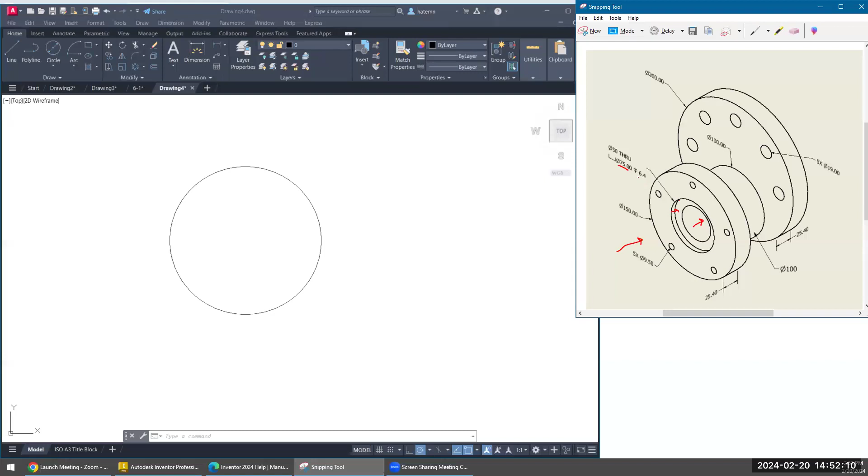And then our second circle here has a diameter of 50, and then you'll see a diameter of 75. What that means is the inside circle or hole goes all the way through our object, and it's a diameter of 50. Our outside object is a diameter of 75, and it only goes down a depth of 6.4. So we don't have to worry about our depth yet, but we do have to worry about both our sizes.

So we'll go ahead and grab our circle, put our 75, and then also grab our circle and put in our 50. And these go all the way through our object. We'll also see that on the back side, we have a diameter of 100. So let's go ahead and put that in.

So as not to get too many circles on here, because then we also have this circle here, which is offset. You could also stop here and finish this part, but I'm going to go ahead and continue, and you'll see how it's drawn as we go.

Now, one of the things I'm going to tell you that might be a little bit easier is, since we know this 100 we just created is going to be a hidden line, because if you look at it from the front, you're not going to be able to see it. So it may be a good idea to go ahead and make that a hidden line.

If you don't have your layers created, all you have to do is go to your layer properties, and we'll go ahead and create a hidden line, and we'll just add the items as we need them. And I'm actually going to make this orange. And then don't forget, you have to change your line type. So we're going to go to load, go down here to our hidden, and make sure we select hidden, otherwise continuous is going to stay.

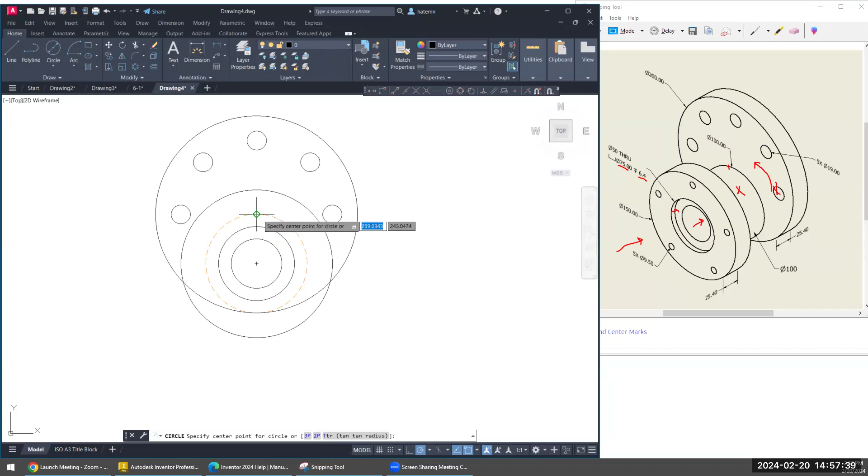And it looks to me like in the textbook, again, I don't have it on my drawing here, it's aligned on a 125 diameter circle, so 62.5. So we'll do our snap from. And 62.5 is just half of 125. Put our at symbol. We're not going left or right. We're actually going straight up. So we'll put our 0, comma, 62.5. And there's the center of our circle.

And we can go ahead and put the size, and in this case, it looks like it's 9.5. We'll do our array, select our circle, hit enter, select our center location, and you'll see 6 is the default, but we're going to change that to 5, and then select close. So that's everything that we would need at this point.

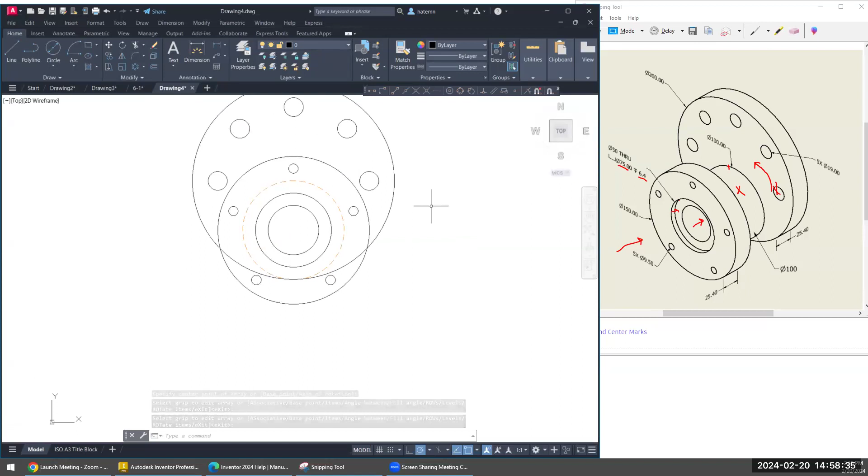Now, one thing you will notice is we have some things, for example, this circle here, we do see this outer arc, but the arc in here, we actually don't see. So we're going to have to trim that component off. Let's get rid of that. But we have to still show it. So you can do this in one of 2 ways.

You could create an arc using endpoint and center, or sometimes I find it just quicker to just create a new circle that's a hidden line, and then go ahead and trim the excess. There we go. So there's that hidden line coming through, and there's my circles here, circles meaning holes. We're not going to worry about our dimensions or anything like this.

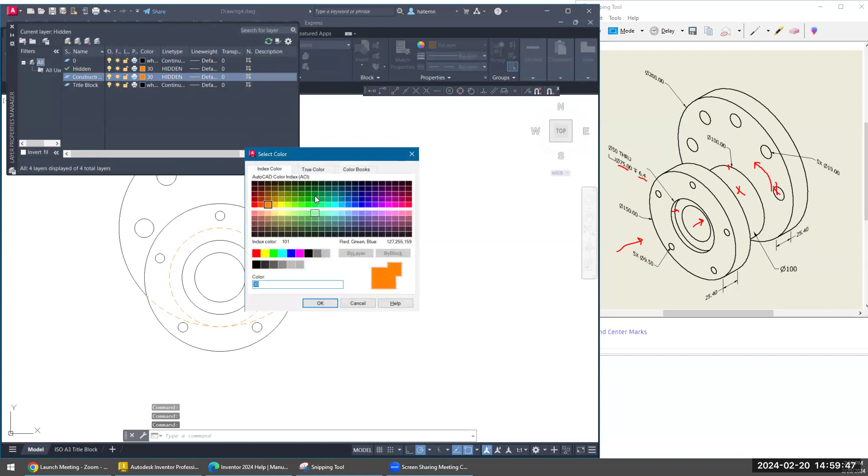So if we were going to create a side view of this to show additional information, because we don't know widths of any of these, I'm going to create a construction line. I'm going to make it solid. Oops, let's put our gray color in there and then make it solid. You get that object line. And again, I don't particularly like using construction lines. I just use individual lines, but you could do whichever is best.

Whoops, let's change it to our construction line. From our quadrant, let's slide it over. From our quadrant, slide it over. And you can keep them all aligned if you want to. Doesn't really matter because they won't be visible. All of our quadrants we have to show over here. So let's just keep repeating as we go.

Now, if you find it easier not to do all of them at once, you certainly do not have to. So you could do just the larger circle first and get its width in. Then you could do that smaller offset circle right here and get its width in. But for me, I like to go ahead and put them all in at once. But again, that is personal preference. All right, got a couple more here.

I'm going to go ahead and change to my object line. And I'm just going to create that full size, because remember, when we look at rectangles from the side, they are rectangles. When we look at our circles, our holes, our cylinders from the side, they look like rectangles. Sorry about that. So the width of this is 25.4. So I could just go from here and I can move in my 25.4.

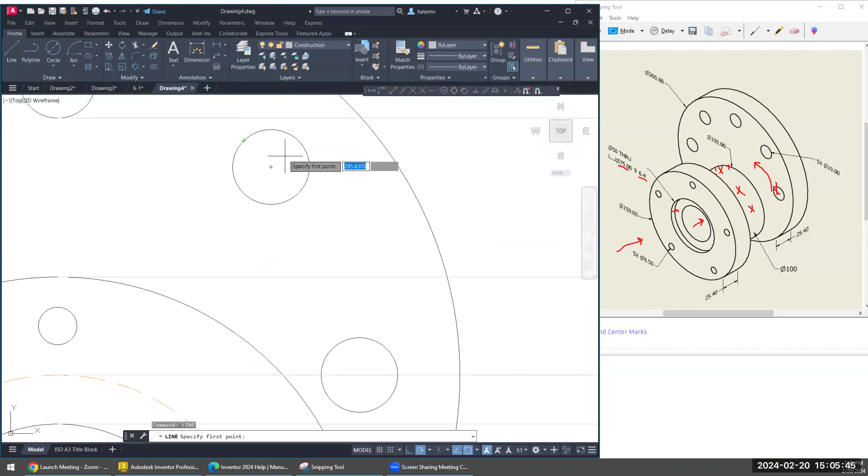But you can see there's a lot of information we don't have done yet. We don't have these holes in. And if I came in here, let's turn that construction line back on, and added construction lines for every single one of these holes. Let's do this one first because we'll be utilizing this one. Oops. Oh, it rotated my quadrant. That's why I'm like, what's it doing? You could see that it'd be very difficult to see what the part actually looked like with all these additional hidden lines. So we are not going to add all of those.

We're going to create a section view. But we will show this one, because when we cut this straight in half, it cuts this hole in half, and that's a good visual for us. So let's first go ahead and get our cutting plane on. So we need to create another layer, and it's called cutting plane. And let's go ahead and make it magenta. I don't know, I just like that.

And the line type is not a solid line, it's called a phantom line, which is very similar to a center line, except it's long dash, short dash, short dash, long dash. Make sure we choose that one and select OK. And then we'll go ahead and make it active, and we'll create our line. We want to line it right up, and a cutting plane line is exactly what it sounds like.

If I took this out to a bandsaw and I cut it, that's our cutting plane line. That would be the line that we cut across. So if I cut right across there, you'll see it intersects that hole, right? So go ahead and make that our hidden line because we can see our line. And again, we only want to place hidden lines over here on holes that we're cutting through its entirety.

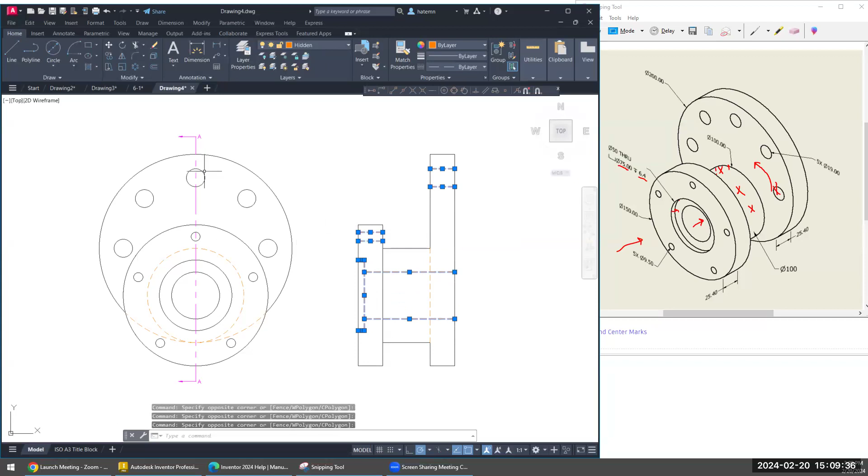So now it's telling me that I'm going to cut this piece in half. I'm throwing this right side away and looking at it. These would be my eyes looking at that piece. So once I put that cutting plane in here, all of these lines here now become solid object lines because I can actually see the edge where I cut the hole. I can see the edge of this hole going down through. So I can just select them all and I can turn them into a solid line.

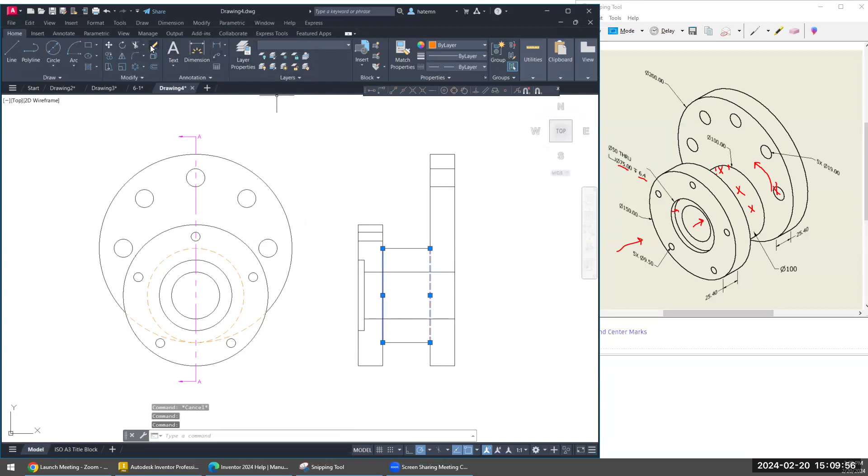Now we do have to remove some things because if I cut through here, we no longer see these two lines because we're cutting through that cylinder here. Now to distinguish this from a solid line, we have to create what's called section lines. So we're going to type in section. I'm going to leave it as purple, but I'm going to make it a continuous solid line again.

So we're going to be on our section lines, and we're going to create what's called a hatch pattern. So when you cut through metal or wood or whatever, it leaves kind of like saw marks. And that's basically what we're going to create here. And we're just going to use the ANSI 31 as our standard. So you just make sure it's highlighted. And then we're going to make sure pick points are highlighted. So anywhere that has a closed surface is going to have those hatch marks. There we go, to create our section line. Once we're finished, we close our hatch. And there is our sectioned view.

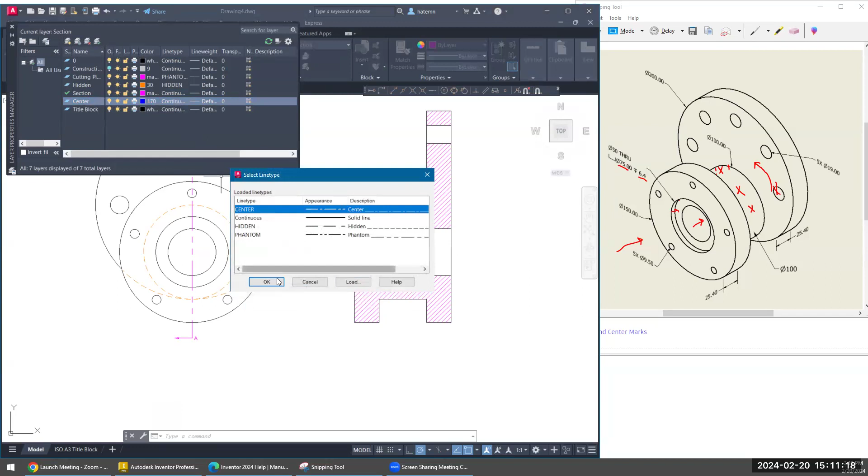We're not quite finished because we do need to add our center lines. So we'll write center here. And let's make this one blue. And we had to change from continuous to center. And you'll find it's probably easier at this point to create your set of layers and stick with them as we move through the course, because everything else that we do, unless otherwise noted, should have the same layers.

So from our front view, from the center of our circle, let's bring our circle over, create our center line, do the same thing on the other side. Create our center line. We did not extend it up far enough. We need to go a little bit further. And then last but certainly not least, the center of this hole going through. And let's make sure it's nice and aligned with both sides, and just keeps it nice and clean.

And that's how you create a section view. This will be part 1 of the video. Part 2 will be how to add dimensions.